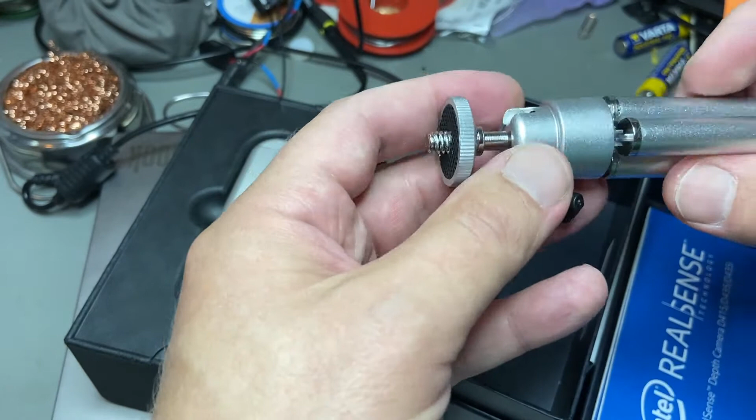What's in here? Let's look at this first. Okay, USB-C cable, so that's one. I need to have a computer in the autonomous TRX-6 that has a USB-C connector. I kind of knew that already. Then a small tripod, oh this is actually quite nice. Quite sturdy. I don't know if I'm going to incorporate this as part or just use a screw thread.

Maybe this part will only be in the car or something else. Now into the camera itself. How do I... ooh, oh wow. So there's a protective film. So it's really heavy, it's really, it's small. You can see my hands up, but it's really heavy.

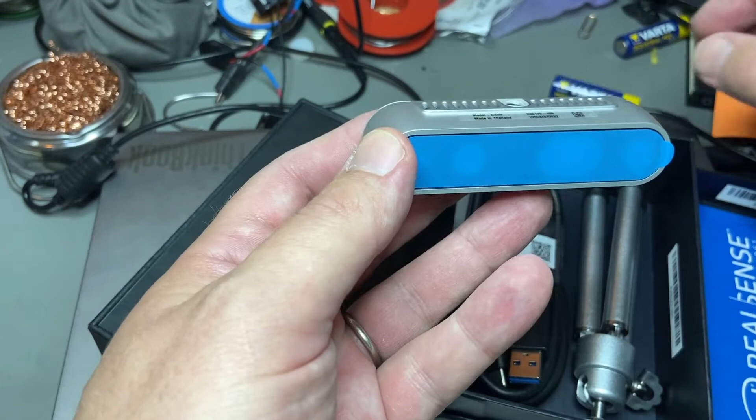Here's a battery compared to it. Really heavy, really substantial. Oh, I think it's aluminum. Okay, there's some holes which is prone for water going in, and other locations too, but that won't be a problem.

Okay, let's remove this one. Ooh, this is always so fun. Okay, it gets stuck everywhere else, but so this is the different lenses and cameras for creating the 3D image of the surroundings. So this version which I took is the i version, D435i. At least it should be here at the bottom.

Yep, so it has an inertial measurement unit giving acceleration information and orientation information of the sensor. So when I attach it to the car, it will also simultaneously give me information of the car, angle, orientation, if it's an incline, if it's moving or not, all that stuff. So that's excellent, that's why I took this specific model.

There's a camera thread for the tripod. Why I chose this model is not only because of the IMU, but because when it comes to 3D cameras, there's quite a lot available. Some provide just stereo image, and then you need to do calculation of the depth map or the obstacles, the visuals of the obstacles which you see in front of you, in a computer. Well, that requires a lot of power energy, and if you have dedicated semiconductors or equipment which is meant for that use, like in this case Intel has an ASIC inside this, this one will provide the map ready.

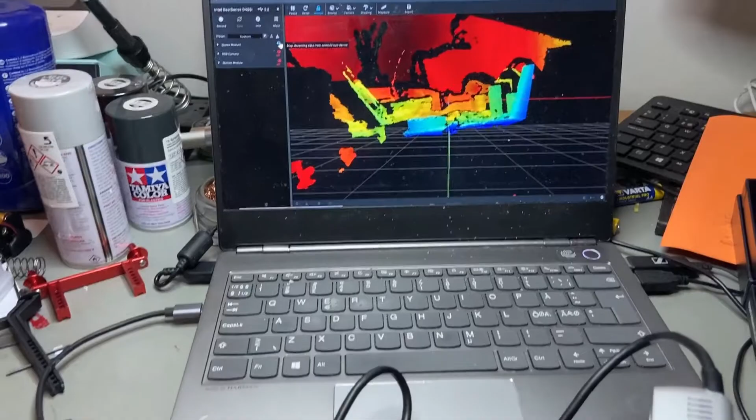Let's enable stereo module. Okay, so this is what it sees now. This is the camera, I will move it around. Let's see my hand. My hand is here. The different colors just mean that it's different distance, it doesn't actually mean that it's that color.

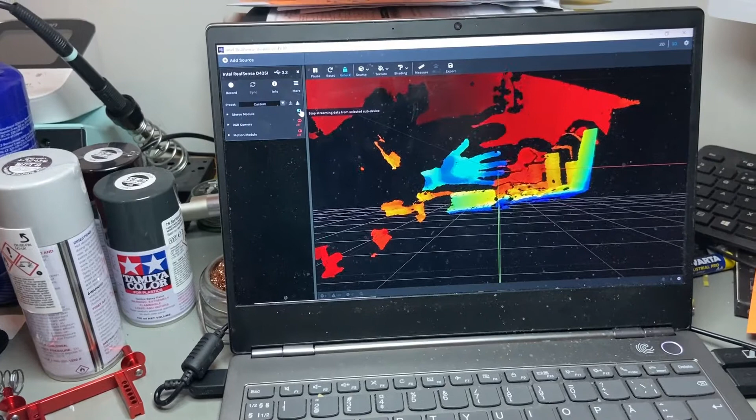You can enable their camera that will tell more. So this is just my hand showing the different distances. The colors are very close to each other, so it means that they're about the same distance from the camera. Let's use this as a reference. My hand is coming closer and closer to the camera. Now it starts to get black, meaning can't see the distance.

Very quick, I would say. Yeah, I would say about 30 centimeters distance it can see my hand perfectly. So basically, if I put the cabin in the car and this camera will be on top behind it, it should see right what's in front of the camera. Looks good, so let's try around.

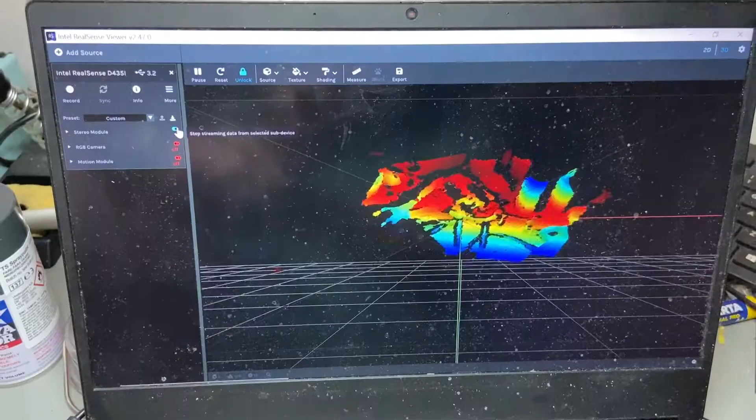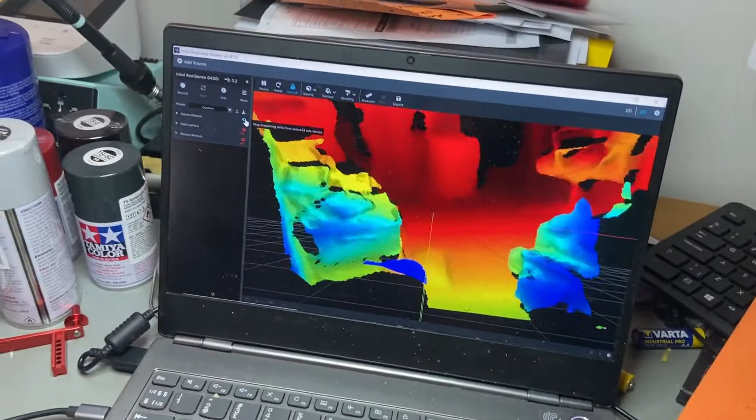So you can see my spray cans, you can see the box of this camera. Thin objects, let's try - there's the blue one you can see. That's actually my lamp, it can somehow see that too. If I look into the rest of the room, you can see my robot there quite well. So definitely when the distance is more, there's longer distance, it can see much better.

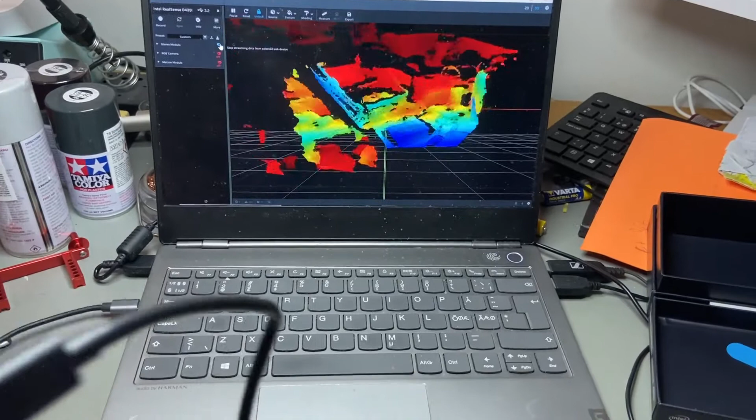But I don't think that will be a problem in mapping, meaning we just have more information further away. But more important, it can still see things relatively close. Now it's looking at my laptop there. So I think this should do quite fine.

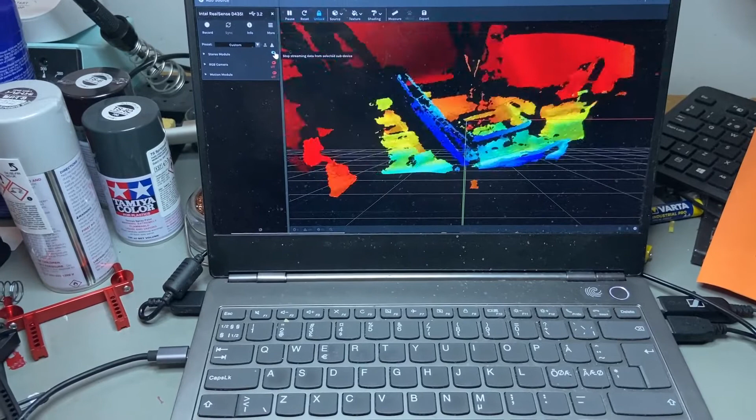So I don't know how well it will work outside, but looks really nice. And these colors really are the distances to the individual points in the object. So yeah, looks really good. So this part of the test was quite successful.